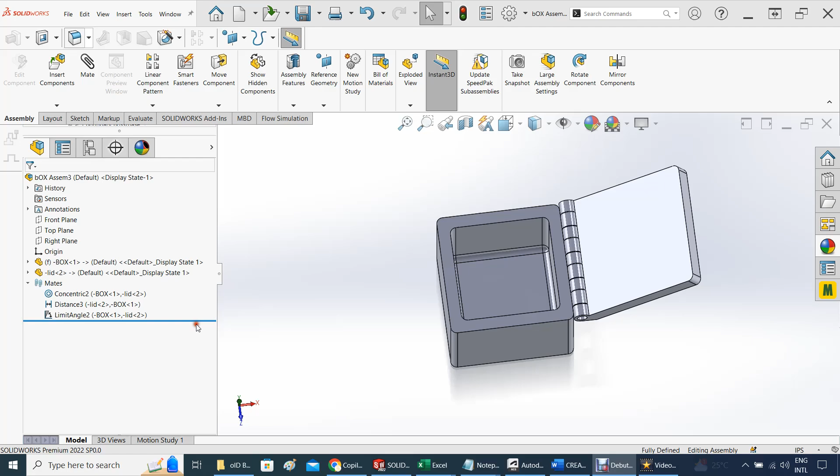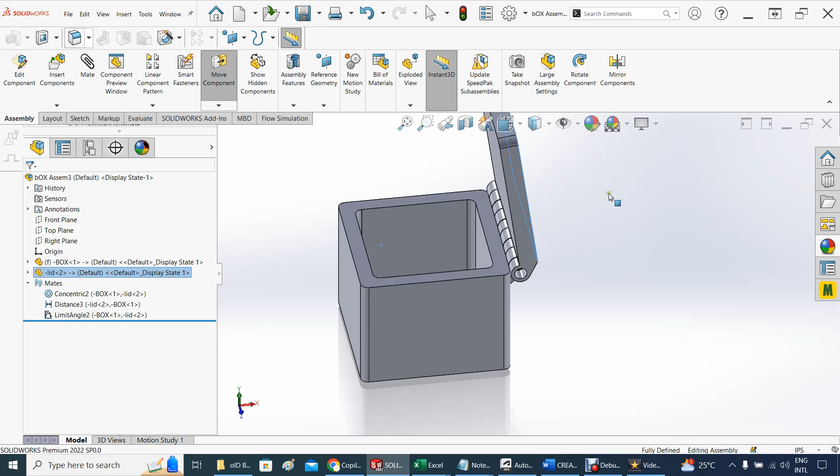Hello folks, today we're going to be discussing how to build this kind of a 4x4 box, 4x4 inches type of box, and how to construct this hinge so that it doesn't give you trouble. This is going to be for 3D printing, so I kind of smooth some of the edges as well so that it looks nice, even internally, as you can see here. So this video is about how to do this the easy way without much knowledge about SolidWorks. You can do a lot with a few instructions here and there. So that's the main point. Without any further ado, let's get busy.

All right, so here we are. Let's start by creating our box here. Let's call a new one. It's gonna be a new part, and I don't like that. Let's change this to plain white. It's gonna be millimeters. There we go. So we are ready now to go.

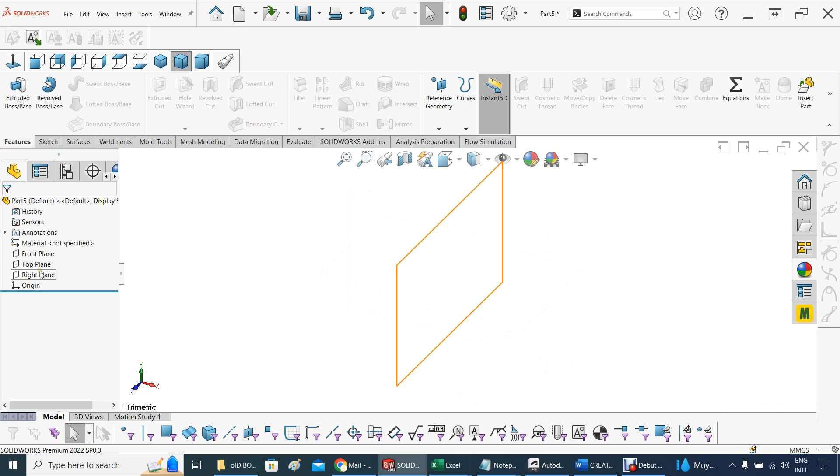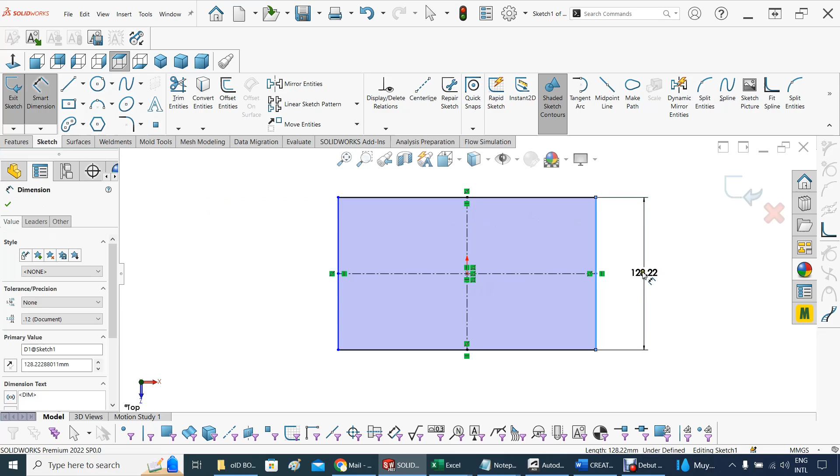Let's see what would be better. Let's work on the top plane, and let's create a sketch there, and we are ready to go. Let's get a center rectangle, and let's see what would be a good size for this. It's gonna be about 4 inches, so you can do 25.4 millimeters times 4. Let's do the same here, so that's 101.6. That will do for a square box.

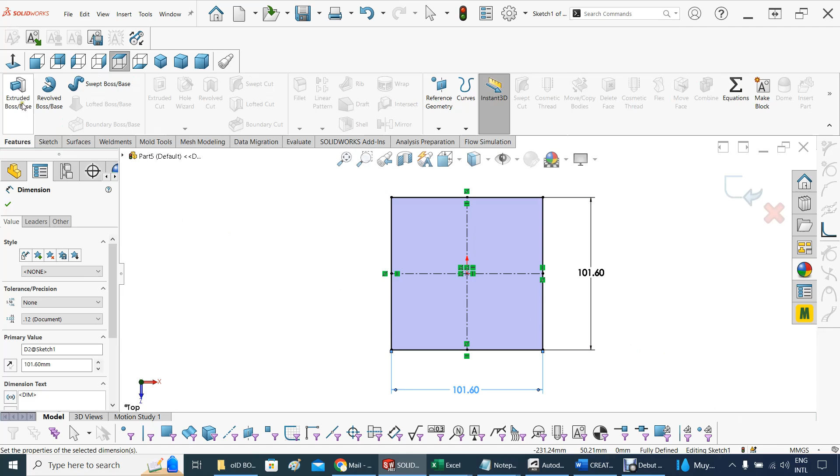Now we are ready to go to features, extrude. Now we're gonna extrude about, if I remember, let me check on that one. All right, so it's gonna be blind. It's gonna be 3 inches times 25.4. Actually, there's something weird here. Let's go back here. So it's 3 times 25.4. There we go, that's about 76.2, and that will do. So there we go, we have our box there, and this is what we're gonna do.

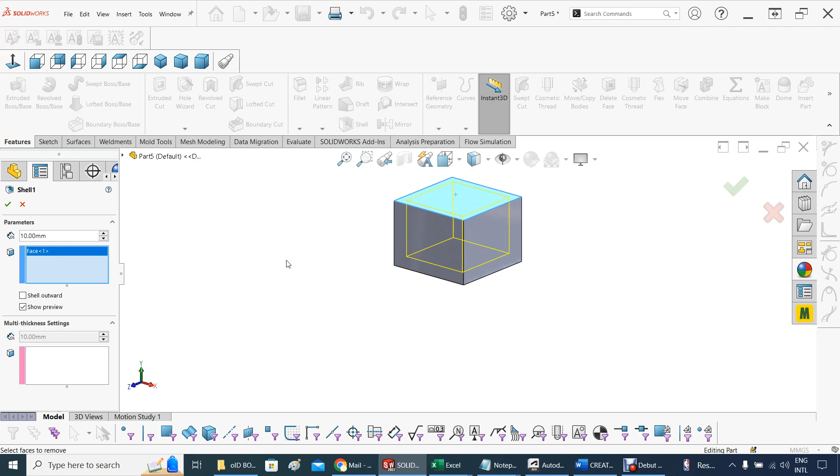We're gonna empty the box. After that extrusion, what we're gonna do is hollow the box, so for that we're going to use shell, and the face will be this one, and 10 millimeters, so that will do. Let's see how that looks. Show preview, that's perfect. You can see the face where we're gonna start hollowing it out. We accept that. There we go.

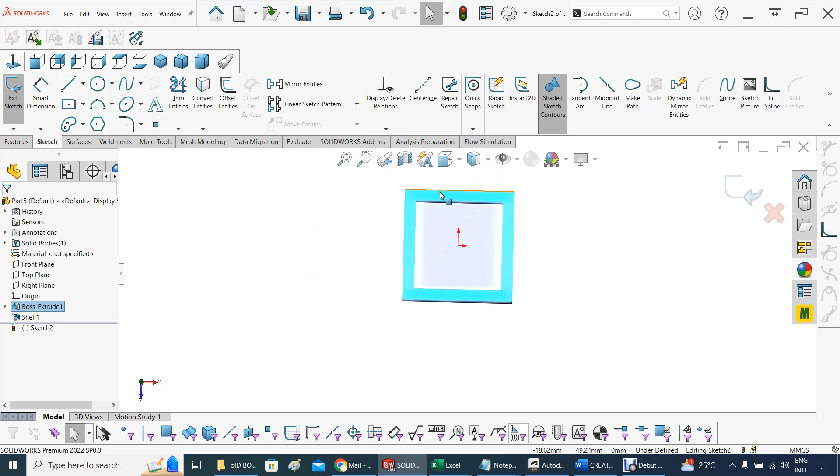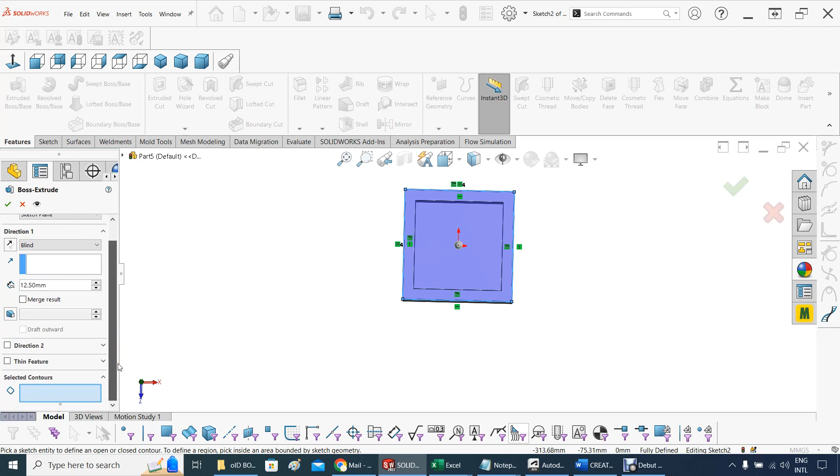So now we touch this face here, that one there, and what we're gonna do on that face is create a sketch, and we can convert the whole thing, and now we can put the lid on it. So we're gonna take a corner rectangle, and we're gonna start there, move up to there, and we're gonna extrude features, and that extrusion is gonna be blind as well, but that's gonna be about 12.5, half an inch. It could be less than that, but I'm gonna try half an inch. Now the important thing here, no merging. You don't want any merging, so that's the two objects. Let's say 12.5 millimeters. All right, select contour, it's the only one I have, that one and that one as well. So no merge, and I think we are in good shape. Accept that.

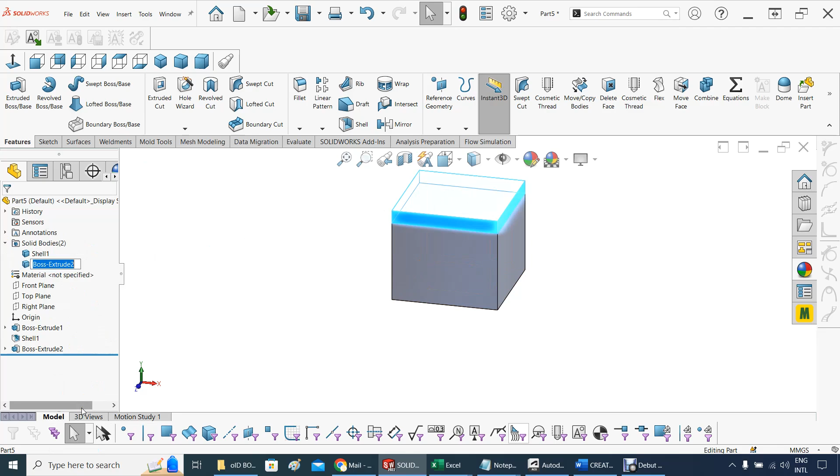Now we have two objects. That's gonna be the lid, so let's rename that the lid, and now this one here is the box. So renamed, this item is gonna be the box.

Now we need to start to work on the lid for the hinge. So it's gonna be a hinge. Let's see where we should put that hinge. Let's look at the isometric here. We can put the isometric there, so let's put the hinge right here on the X. I'm gonna put it right here.

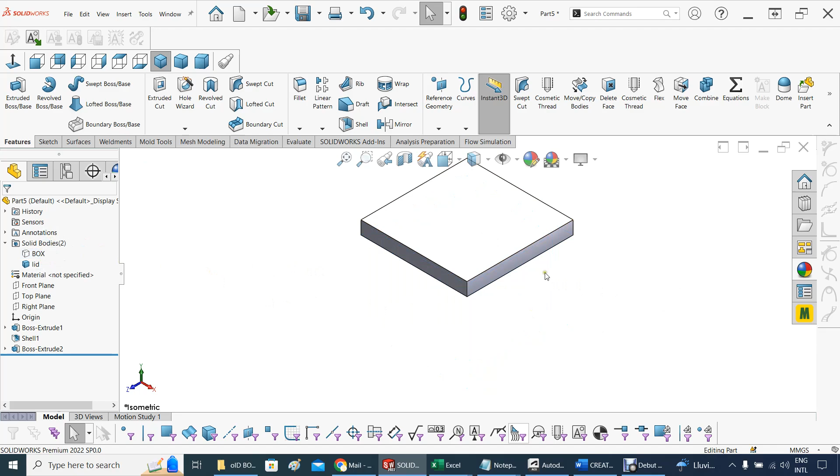So with that said, what I'm gonna do is work here on that. We have the box and the lid, so we're gonna work first on the lid for the hinge. Meaning that I'm gonna make the box disappear just a little bit, so that we can work here on that face. Actually, we're gonna work from this face, just for getting the hinge right. So let's right click here and start to work on that face. Let's bring that face into perspective. There we go, and here's the story. The first thing I want to do perhaps is to get all this.

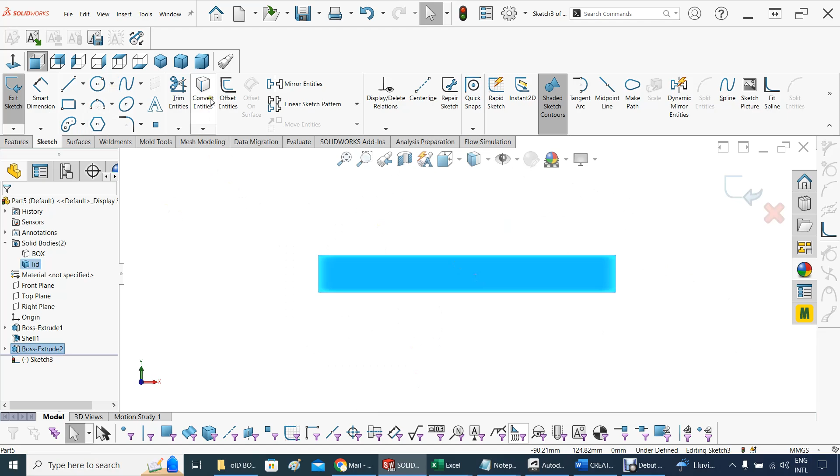Let's convert that entity, and now we're gonna start to work in a circle. That circle should be, let's say, half of it, somewhere there. And now that circle should be...

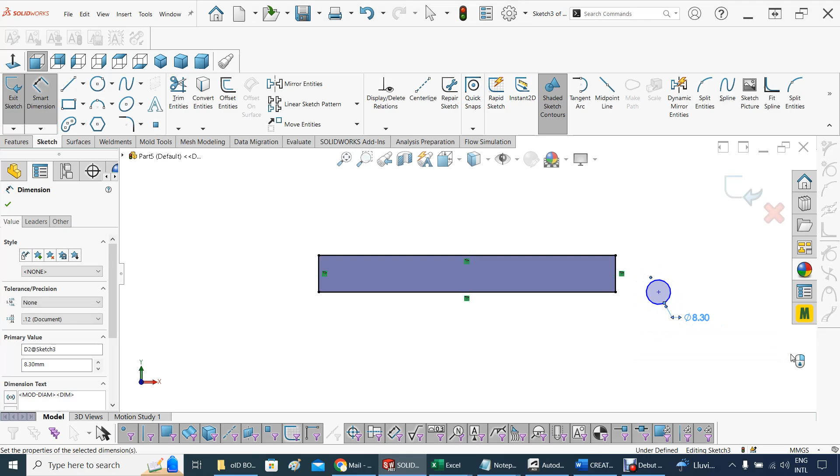That will depend on the precision of your 3D printer. For example, if that's 8 millimeters, I'm gonna put that at 8.2 or 8.3, so you don't have any trouble for your bolt going through. And so that's 8.3. Now let's bring another circle.

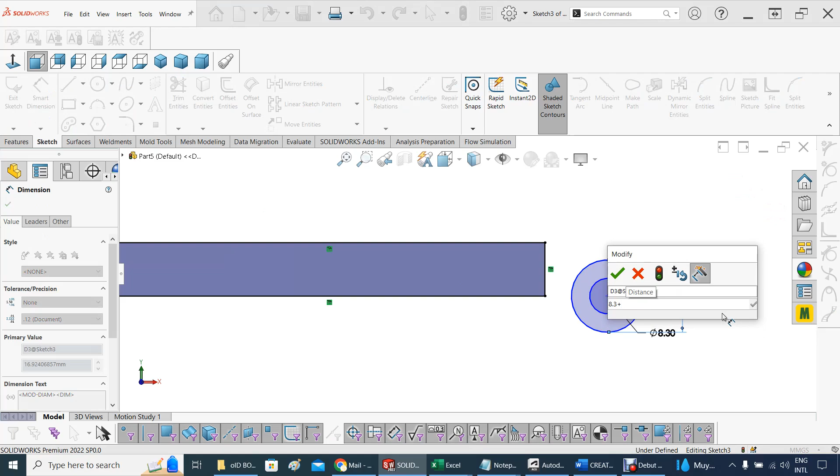That other circle will be, so it's gonna be 8.3 plus some thickness, we'll say 5. That will do. And now what I'm gonna do is make this guy and this point coincident. That will do. Now here's the plan.

We're gonna make a line from this corner, tangent somewhere here. Let's see. Now that point doesn't look tangent to me, so what I'm gonna do is grab that one... tangent. There we go. You can see the symbol right there. So that's good enough for me, because now the next thing that I can certainly do...

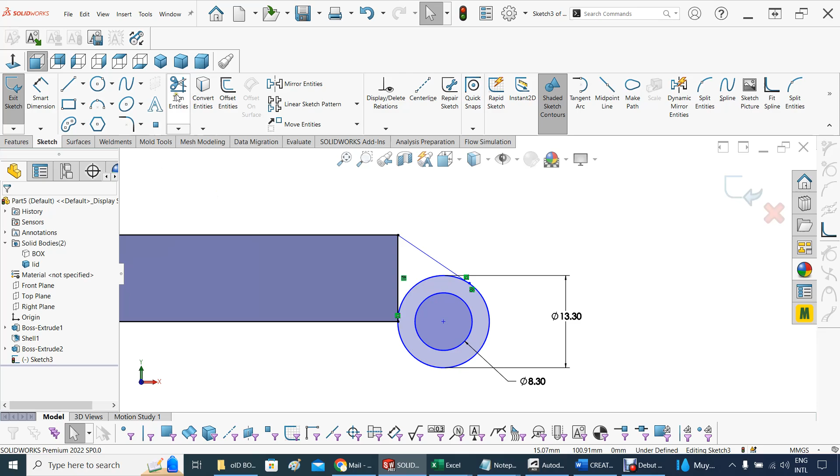Let's trim something here, and I think that will do. That's perfect. That's perfect.

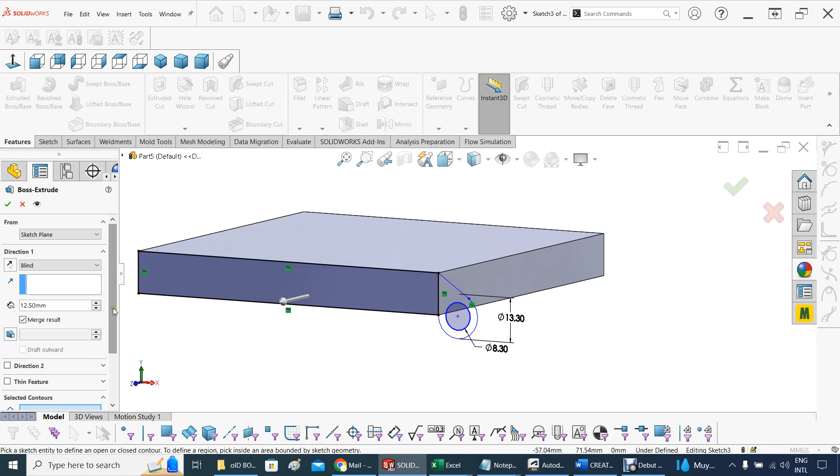Now accept that, we're out of here, and now let's go to feature and extrude. Now what we're gonna extrude, let's get here into the contour. That is the wrong direction, so let's switch the direction. That will do. And what's the thickness of that?

The good thickness of that will be about 10... merge, yes, but that's 10. And...

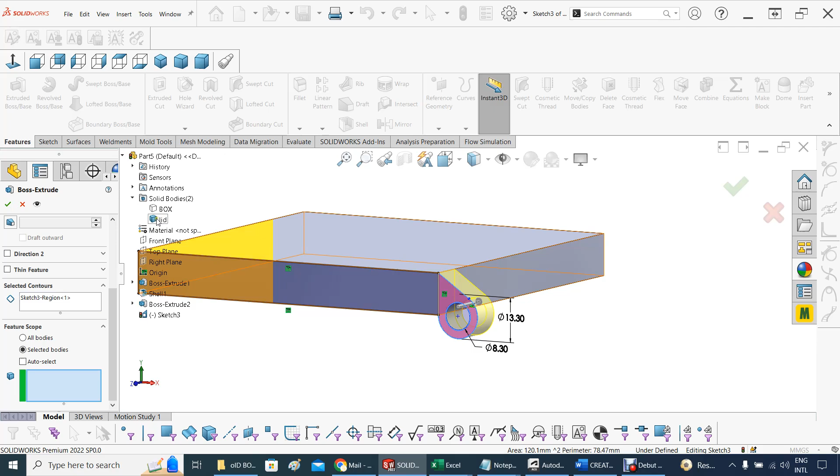Selected body, let's see... selected body here has to be obviously the lid, that will do. Now it's gonna merge to the lid. So with that said, let's see, anything else here that I need to do? It's gonna merge to the lid. That's not great, so we're gonna accept that, and there we go.

There's a little bit of, some people are cracking some fire around, so don't worry about it. Anyway, so with that said, let's see now where we are.

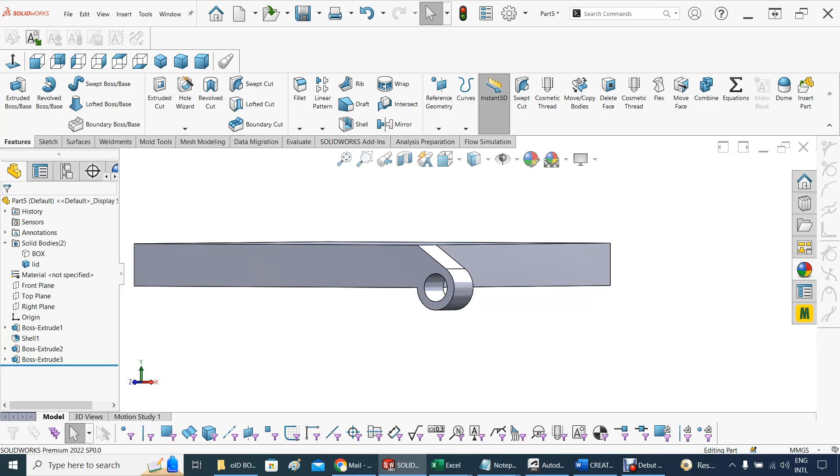What we're gonna do now, I create the first one. So we're gonna create a hinge out of it, and what we're gonna do is create about 5 of this guy through this line. So that's easy if you go to a linear pattern here.

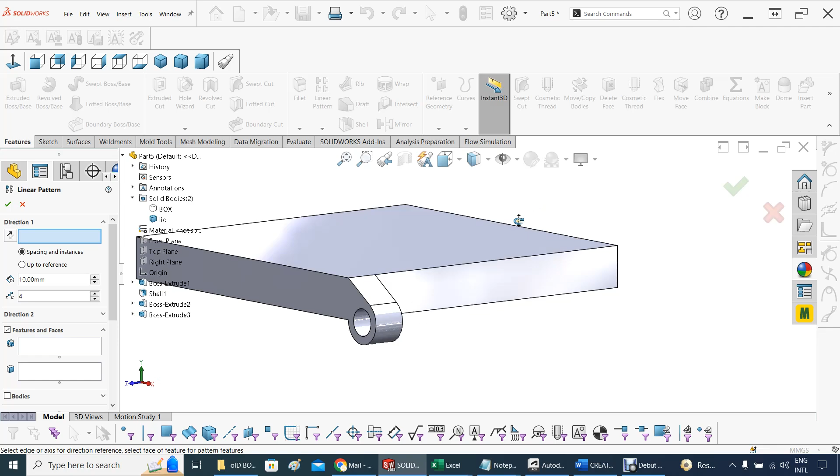So let's go a linear pattern, and we're gonna pick that as direction. Now it's gonna be 5 of these. Now here's the story. You can start to guess.

The idea is you're gonna put as many of these so that they kind of spread all over, but the last one ends up right here. You can do the math. So that would be, remember this length, which is 101 point something, and basically that distance, when you subtract 5 of this guy, because I'm going to install 5 which are 10 millimeters each, that will give a spacing, and the spacing has to be about 22.9.

So what we're gonna copy here, the feature that we're gonna copy is that guy. So you can see how quickly you get right to the edge here. That's perfect. That's why it has to be 22 point something, 22.9, just so that you can fit 5 of this guy for the lid, and anything else here that I need to take a look at.

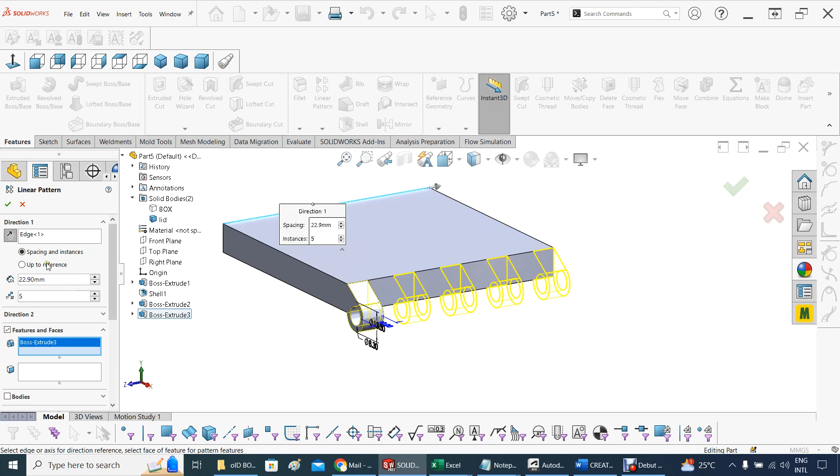Sounds great. Sounds like we got everything set, and we accept that, and there we go. Right there, you have the lid with your half of the hinge.

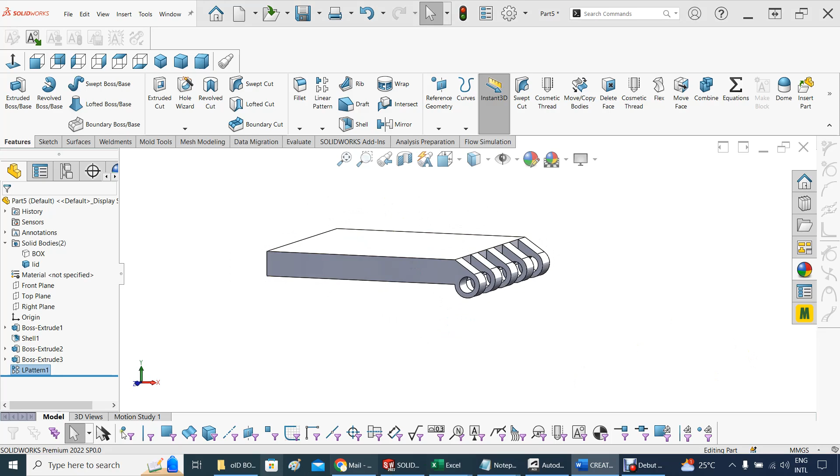Now you need the second half of these hinges that will go on the box that was on the lid. Now let's work on the other part, and let's see how we'll do that. That looks good. So to do the other part, here's the story.

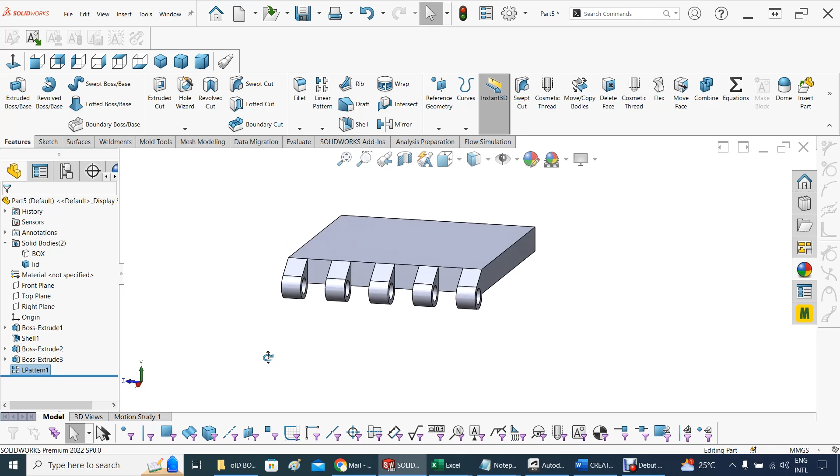The other hinge for the box will start somewhere here, but since this is going to be 3D printed, you don't want to be touching these. You can certainly do it and then do some sanding, but I don't want to do that. So what I'm going to do on this one is to define a plane.

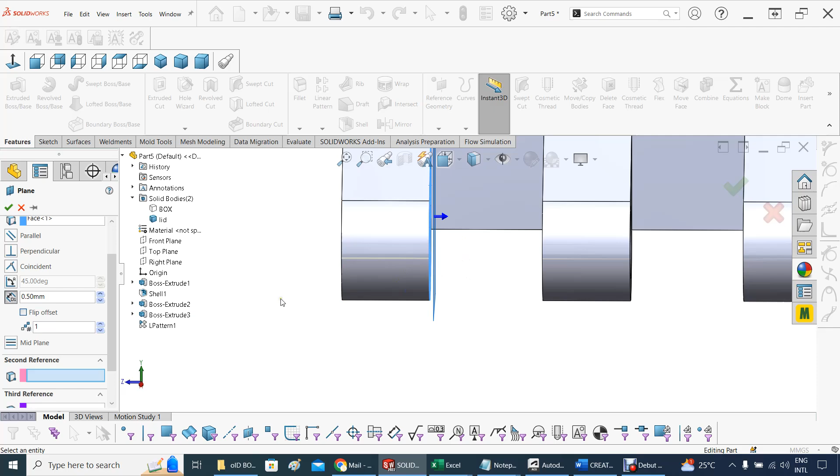So right here somewhere, hit that, and now let's go to reference plane, and 0.5 will do in the right direction. Yep. So that's the distance between here and the other part, right within the precision of your 3D printer. Could be more, could be less, I don't know. I will say 0.5 for the time being.

And with that said, we got that plane done, and now what we're gonna do is work on that plane, and let's create a sketch there, and let's bring that sketch to the right perspective. I don't like that way. One more. There we go. Perfect. So this is the story. What we need now is to perhaps create that one.

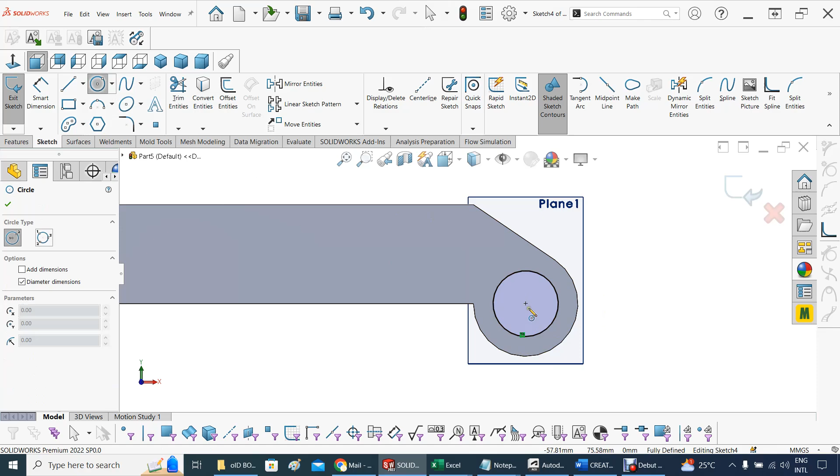I can certainly convert that entity as well, but what I'm going to do now is bring another circle, but this circle will be that one, same diameter, and where we are now.

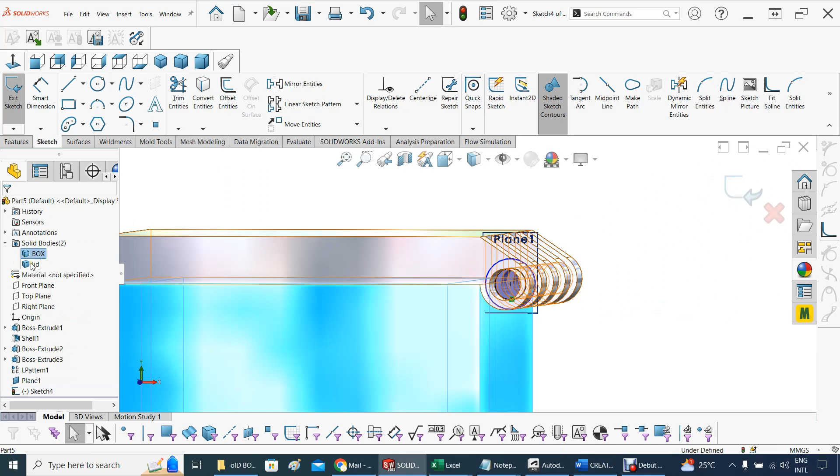All right, so here's the story. You want to make the box visible, but now the lid, you want to disappear that for a little bit until you get this right here, and bring that right into the other way. That will do.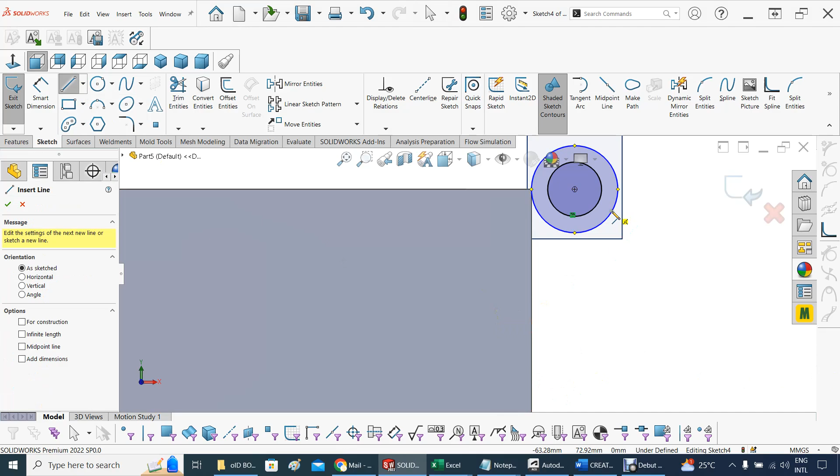Now what we need now is, after we do that, we want to create the support for that, and let's use the line. We're gonna fix that in a second, and let's do the following. That line, oh yeah, it is tangent already.

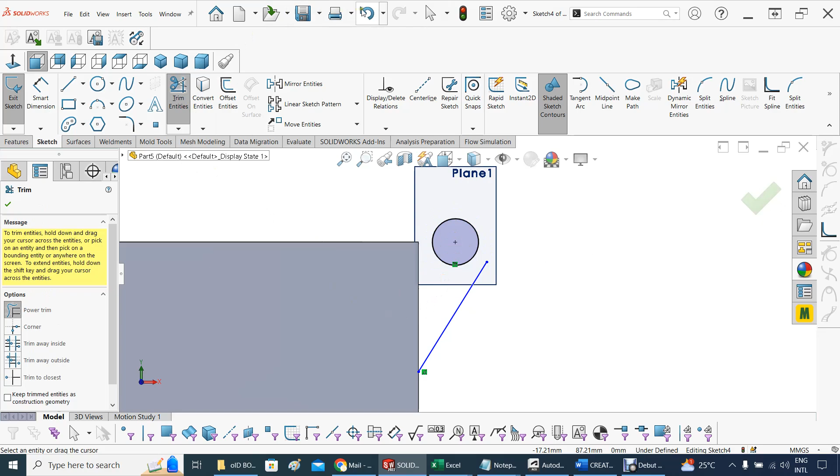Good, it is tangent. So what we're gonna do is, let's see if I can trim a little bit without creating problem. Oops, too much. That'll undo. Let's fix that. And here's the story. Let me try this arc for 1 second here. There we go. I'm gonna try that arc, and let me see now the trim. There we go. That will do.

So I got everything, and I also have the ready to do that. Let me bring another line here. That guy and that guy.

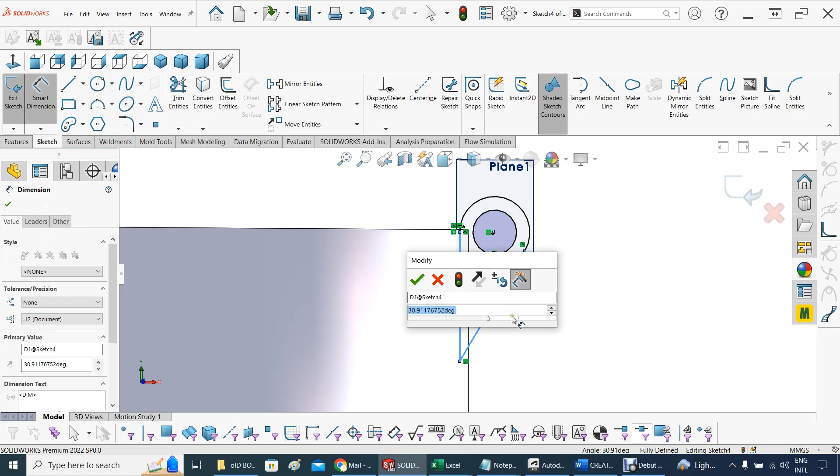All right, there we go. And then let's see, between that guy and that guy, let's see where we are. It should be about 45. That will do. And now we're talking. Yep, that was missing there, sorry.

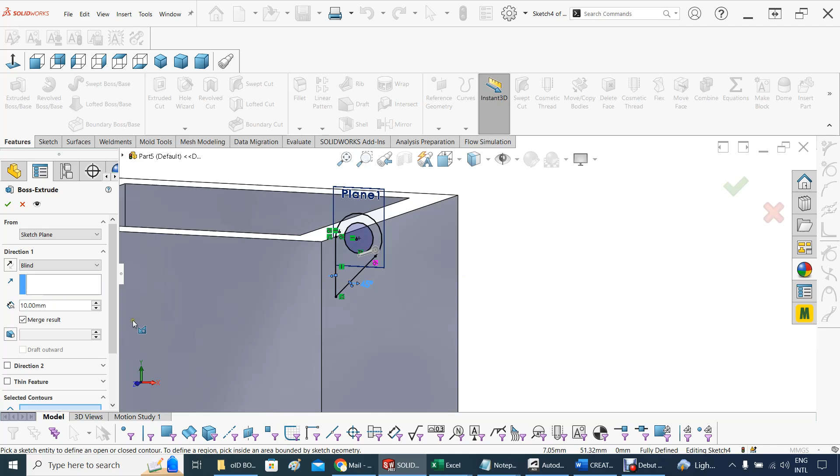So with that said, I think now I can go back here and extrude. Again, let's go to contour. There we go. Now that's gonna be a little bit thicker than the other one, so that's gonna be about 12. Let's see, 12.

And it's gonna merge. Now be careful what you merge here. Select body. It's gonna be definitely the box, so we accept. There we go.

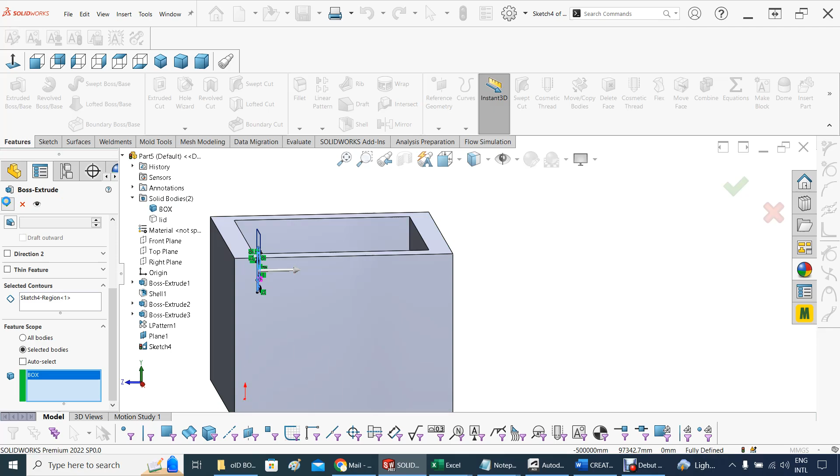Now let's get the plane out, and let's bring the lid. See, you get a distance here of about 0.5, another distance here of about 0.5, pretty much right in where I want it.

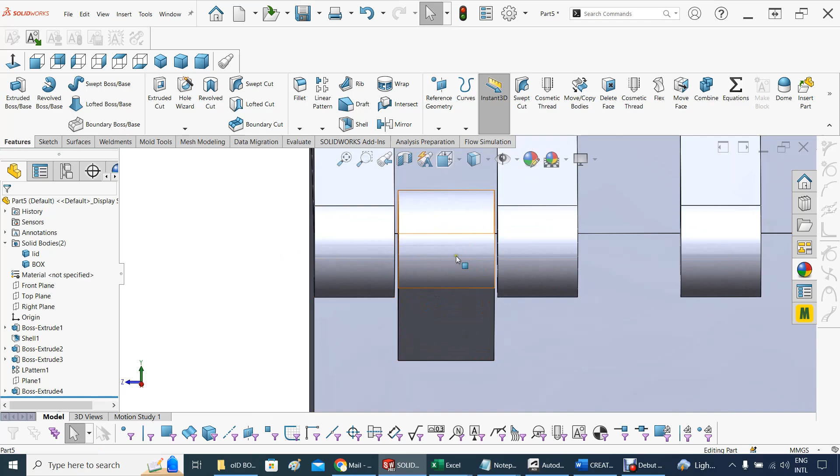All right, so what we need to do is to repeat this guy 1, 2, 3, 3 times. So let's see how this ends up being. All right, so let's see.

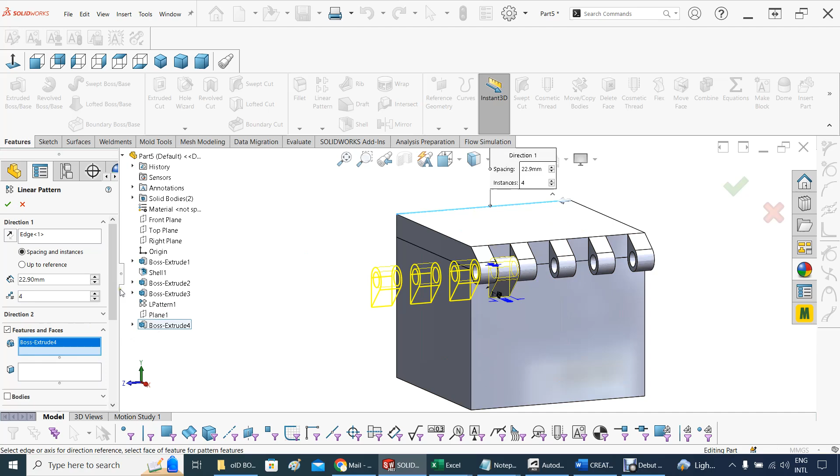Let's go back to pattern, and the direction is that direction, and here should be 4, and picking that, that guy, features that guy, and direction. There we go. Four. All right. There we go.

And anything else? I think that we are pretty good, in pretty good shape. Again, 22.9 ends up being a very important distance. That is based on the total length here. So be careful with that. And we got pretty much everything set. So we accept. And there we go.

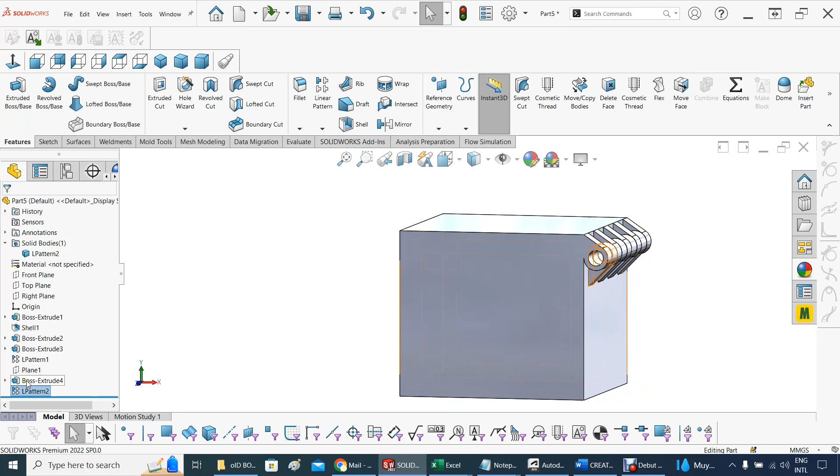Let's see. One body, not good. You see, not good. Let's go back here to that pattern and be sure that's the problem. So let's hide this for a little bit. I got the both, yeah. So the problem was right at the pattern.

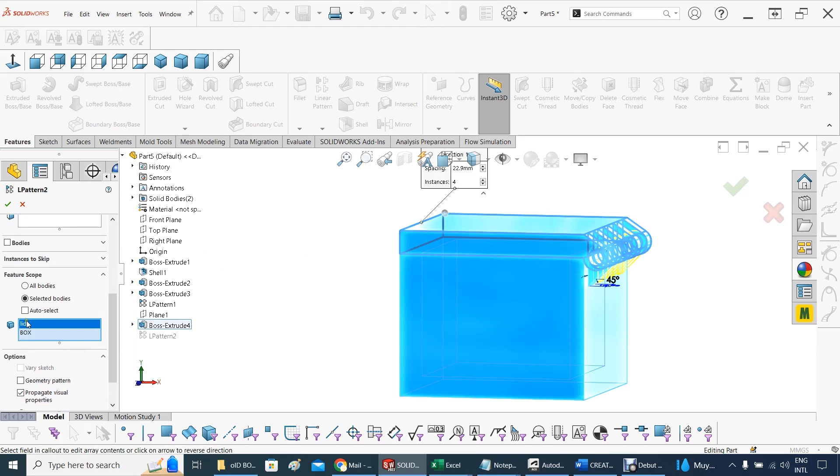Now, let's go back here for a second. And the problem is, oh, got both here selected. No, lid's gotta go, delete. So you stay with the box. And what else I have here? Lid, box, lid, get it out, stay with the box. So no question asked now.

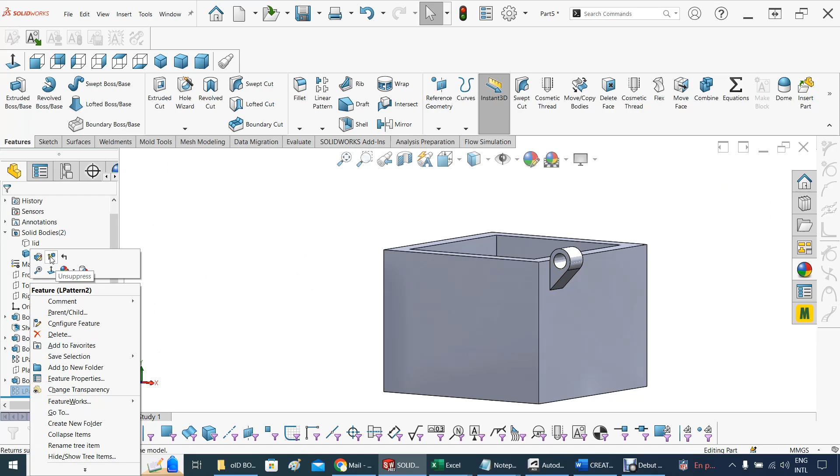And so let's get this going. There we go. All right, let's put back the lid. Now we got the both object. Excellent. That looks good. You see how simple it was?

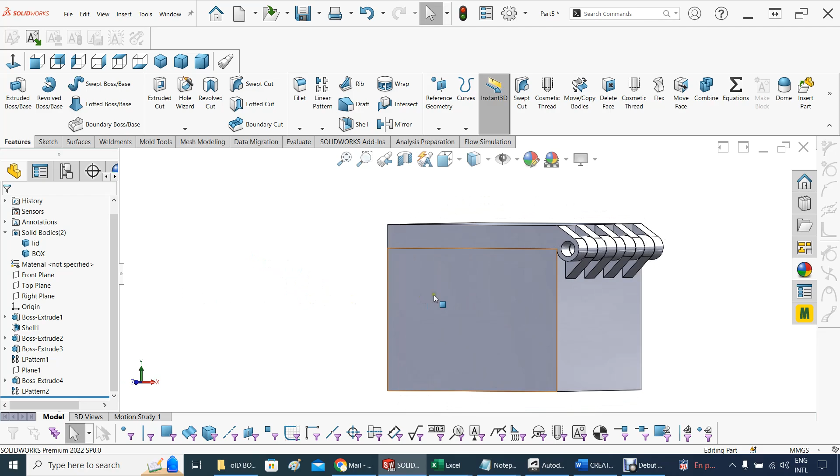So I got the box and the lid. Now, the only thing missing here, if any, is just to put kind of the bolt going right through. You don't need it if you are going to do, in this case, assembling. It's not really needed.

You can certainly insert it and create one for, just to entertain the fact that you need a hinge here. I mean, you need a bolt so that this hinge really works in real time. But what I'm going to do now is just save both pieces now that I've created this kind of hinge.

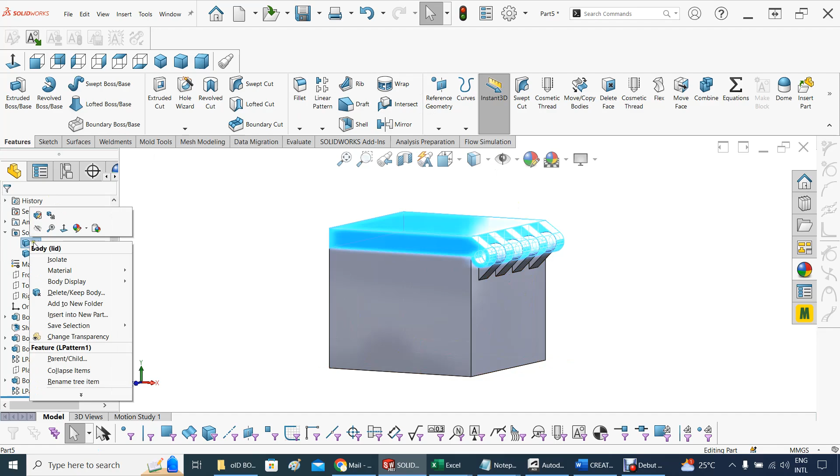So I'm going to save the lid and the box. When you complete that, then you just go to assembling. So for example, let's go to the lid, insert into new part, and that's going to be the lid. So we save, and that's your lid. It's going to ask for saving somewhere, and let's save this.

For the time being, let's save it on the downloads. So I'm going to save there, and then move it someplace else later. Then let's go back again to Solidworks.

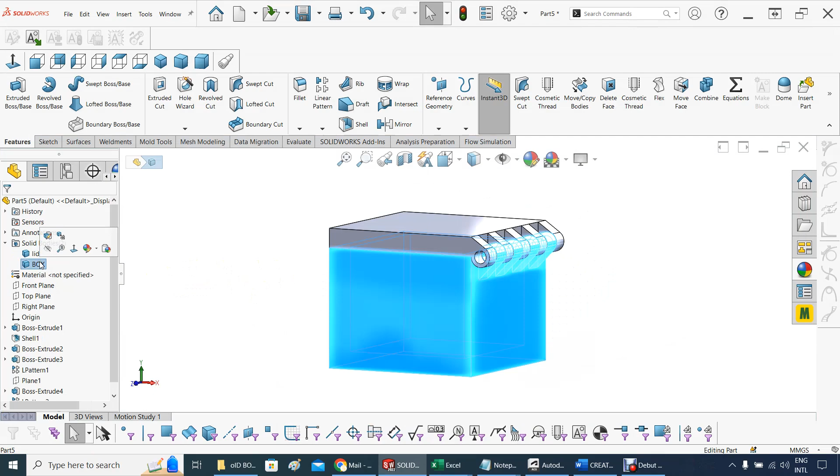Design. Now save the box. Right click, insert into new part, box, save it. Yes, and we say yes. So we got the lid, we got the box, and save. And we are done.

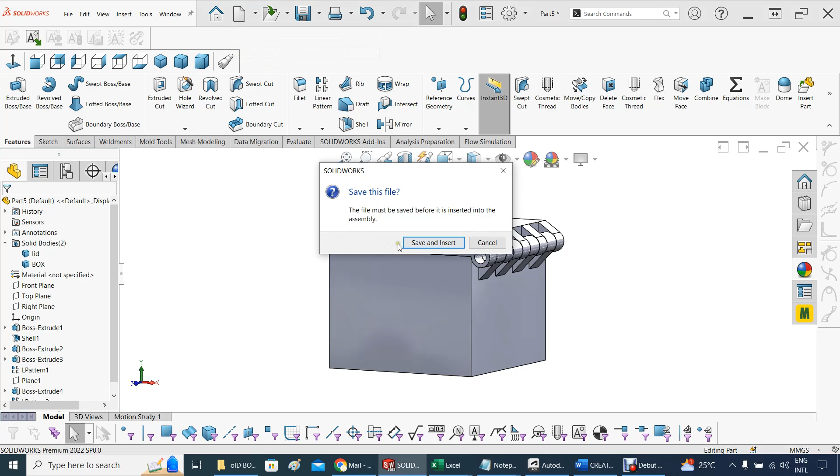Now what we need to do is go back here to the original piece, and let's go to assembling. So let's say new, make assembly from part, save and insert. It's going to be box with hinge rep, or I've done many of those. I'm going to just start to mess with this, and you end up creating many with different sizes and things like that. So here we are.

Now the first thing that I need is definitely the box. So we're going to hit the box here, and let's put the box here somewhere. There's the box. Now the box is fixed. Good. Now insert again, insert component, existing part. That's going to be the lid. Put it here somewhere. There we go.

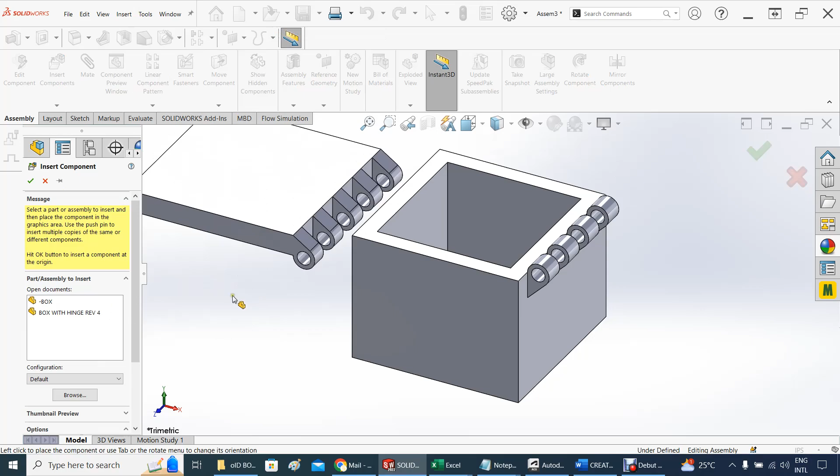Now it's easy to combine this, because basically what you need is that this circle needs to be concentric with this one. Hit control, click here, then let it go, and hit concentric. Now this will move kind of crazy - you don't want that, but it gives you an idea where you are.

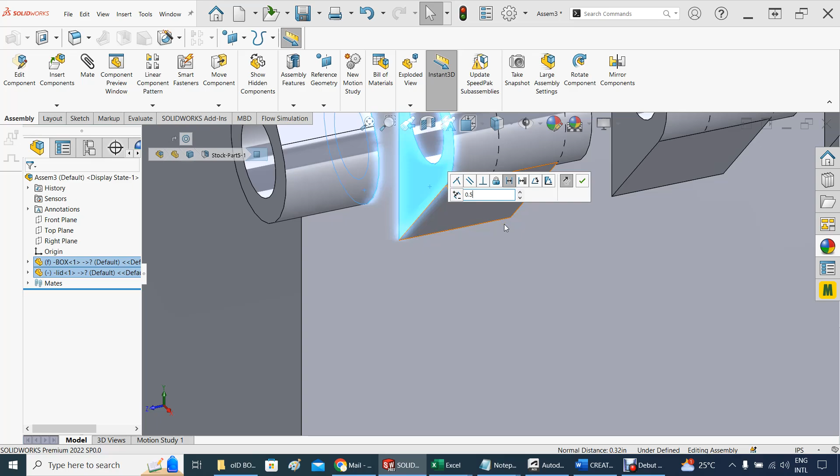Now the next thing is you want the distance that you set before. For this, you said that this surface versus this surface, that distance is about 0.5 inches. So let's say yes, and there we go. Everything aligned properly, but this is kind of weird.

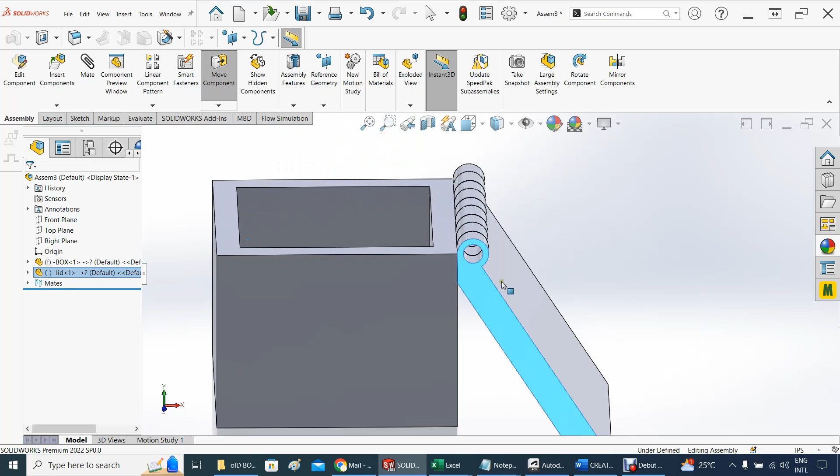You don't want that, but what you really want is that this starts to work as per the design. When it hits here, that should be 0, and let's say that you can open this, I don't know, up to there maybe. Let's see.

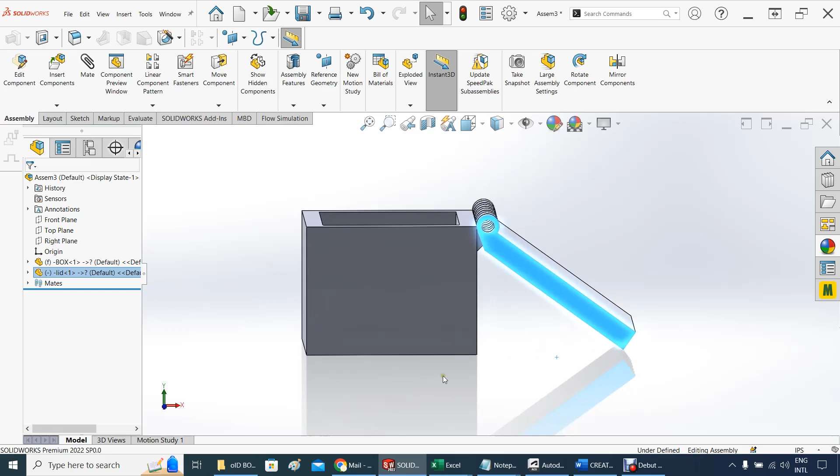I think that should be up to there, up to there - that would be kind of the maximum. But obviously, if the box is going to be beyond this distance, so probably somewhere here is where it will turn. That's easy, I can fix that at a later time.

So basically, what we need at this point is to set the proper angle. So you just set this guy, control, and that guy. So the minimum should be 0 degrees. The maximum maybe 140 - can check that out later. So we accept that. Let's see, 140.

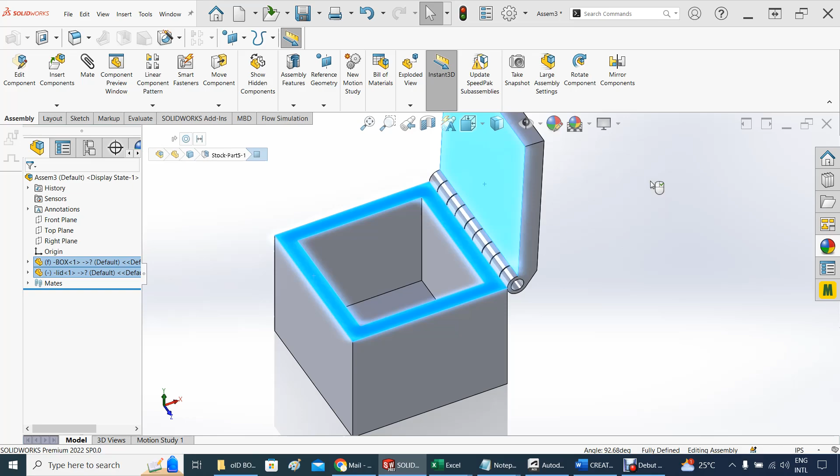Should be more than that, but you see, when it closes, you slam it, it would not go any further from there. And you can open it, but it definitely could open more.

Obviously 180 would be like here. If I go back here and check that limit and revise that one, I can set that to 180 and check 180, accept that, and this can go up there, you see, but it can definitely go beyond 180.

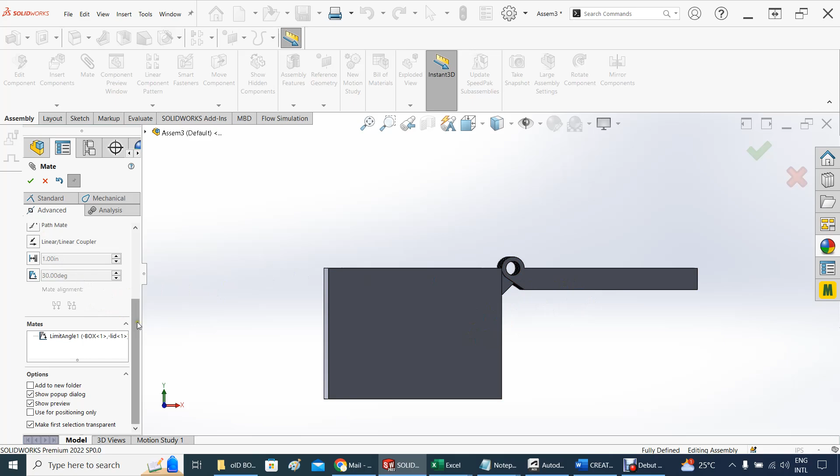I don't know, about, I can estimate that. You can keep messing with it until you find where you want that to go. Let's say a little bit more, about 180... I don't know, 220. Let's see what happens.

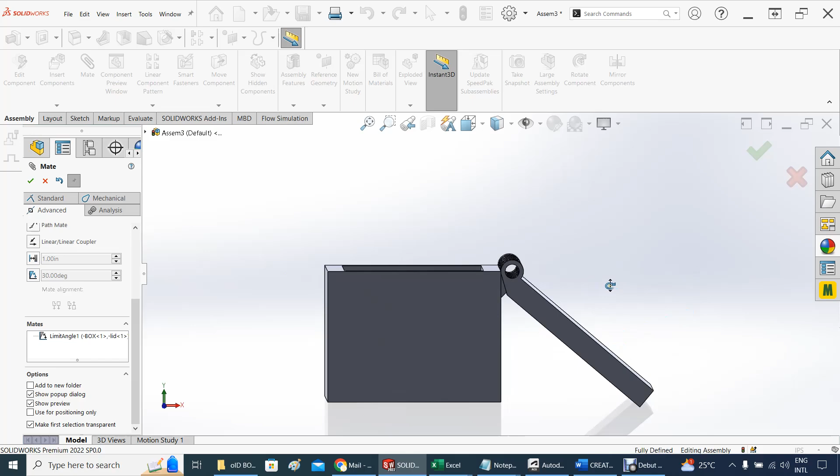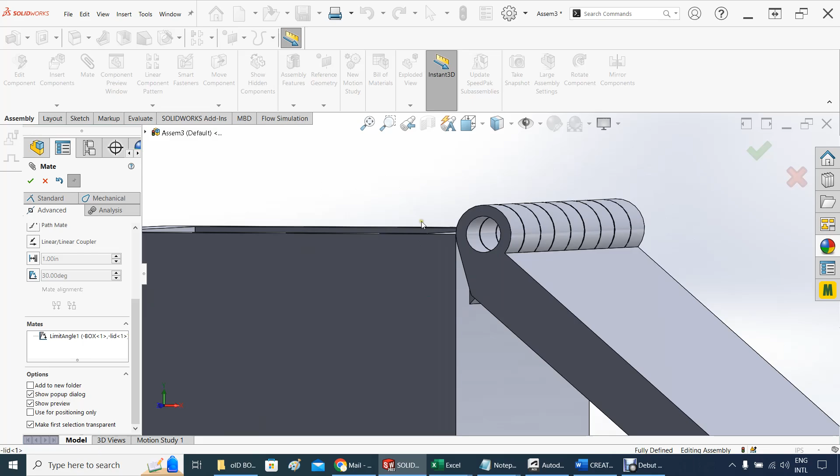There we go. 220 is about almost, maybe less than that, but it gives you an idea how much this will swing without causing trouble. Obviously, when this part here hits this part here, then it's done - that will not move any further. But to give you an idea, that would be beyond the bottom of the box.

But it's kind of cool. You see, now it locks. That's how it works.

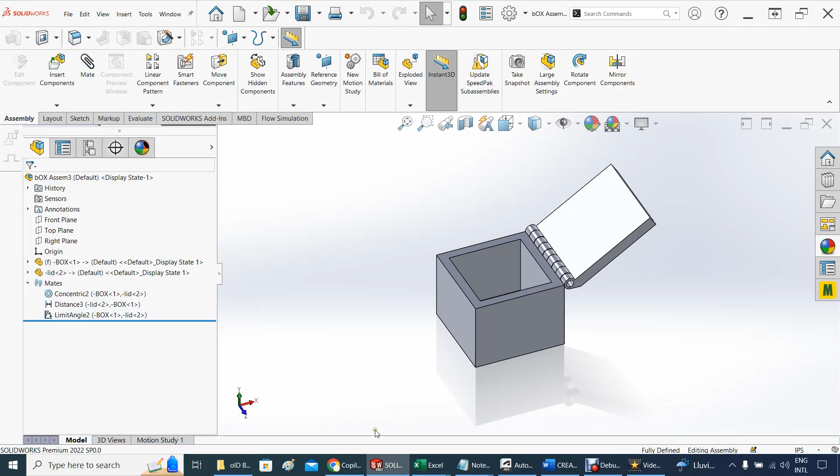Alright, so as a final thing to do, I would like to smooth out these edges a little bit since this is going to be 3D printed. This is one of the nice things about Solidworks. So let's go to our original Solidworks file, right here.

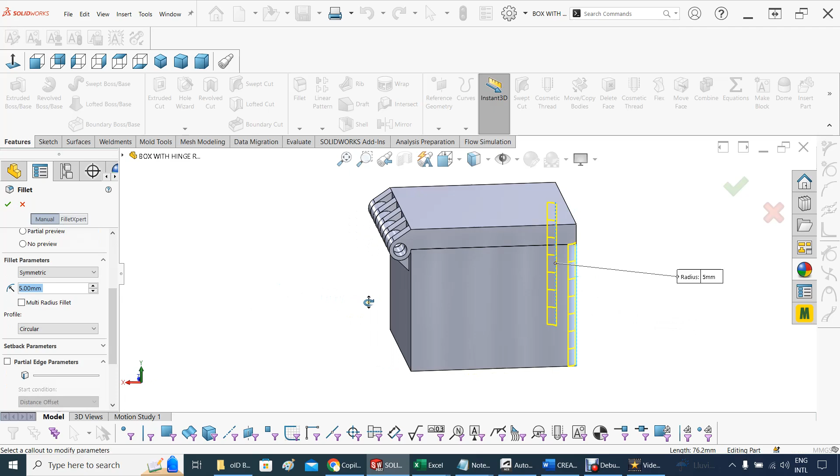Here is our original, and what we're going to do is take one of these edges and go to fillet. Let's say 5 will look good. Maybe it's too much, but no, it sounds good to me. So let's smooth this one as well, and that one, and this one. I'm working on the original, so let's accept that.

Now let's also smooth these edges as well, that one, and that's gonna be 5 as well, symmetric. We're gonna smooth this one as well. That looks good, so we're gonna smooth that out. Now when you smooth those out, remember that these two are sort of the son of this guy, the original.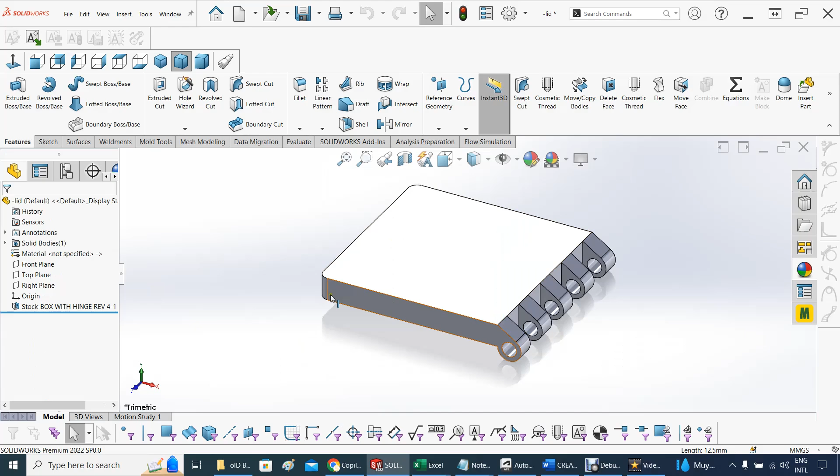So let's go back here and see what's happening. When you touch it, it's updating—check it out, the lid got the smooth edges. If I go back to the box, it's right here, that should also go and update with the smooth edges. Excellent. So once you've done all that, if you go now to your assembly, everything will end up with those smooth edges as well.

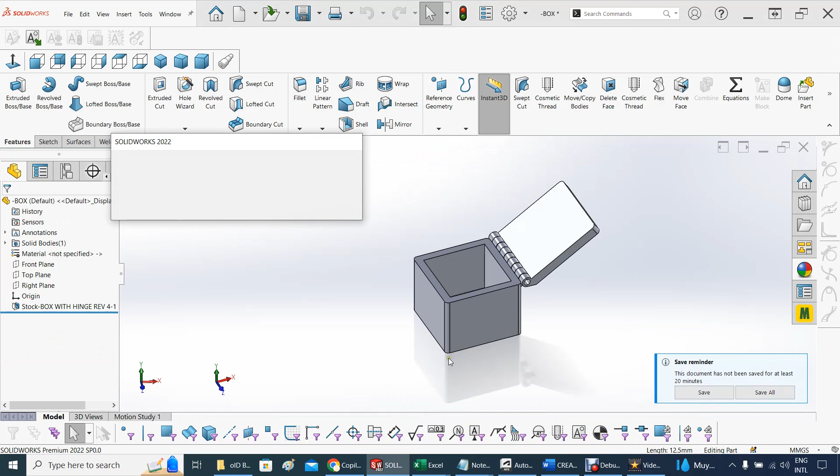So let's go to the assembly. Which one of these? I think it's this one right there. It's updating—model contains assembly that has changed, would you like to rebuild? Yes. So it updated everything, and now let's see this. Yep, looking good, with the smooth edges.

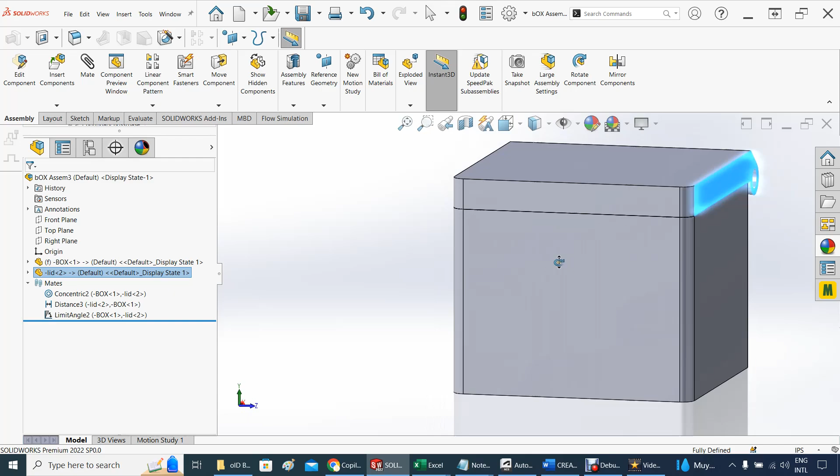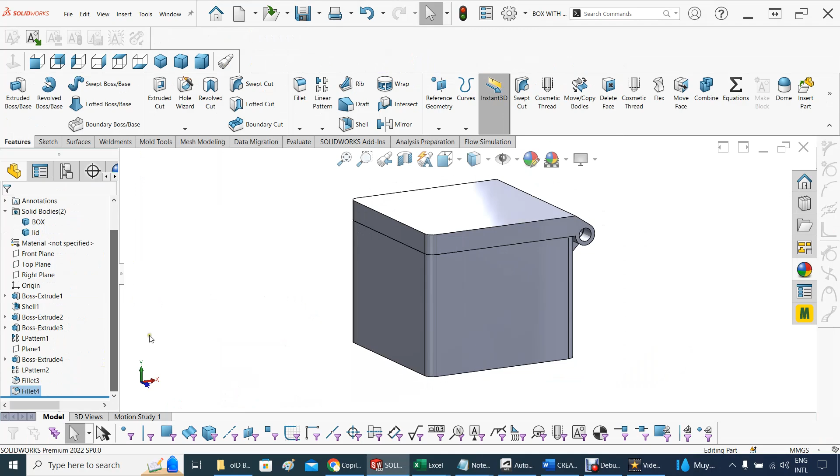Now you can add color if you want to. I don't know, maybe I should add color just to get this done. Let me add some color to this. Let's go back again to the original, and this one, and I'm right there in the original. So now let's go and add some color here.

I really like the green color, and the green is gonna go to that surface, not the whole box, just the body, and that will do. Now let's add some color as well, maybe this yellowish color to the top, again to the box, and that will do. Looking good.

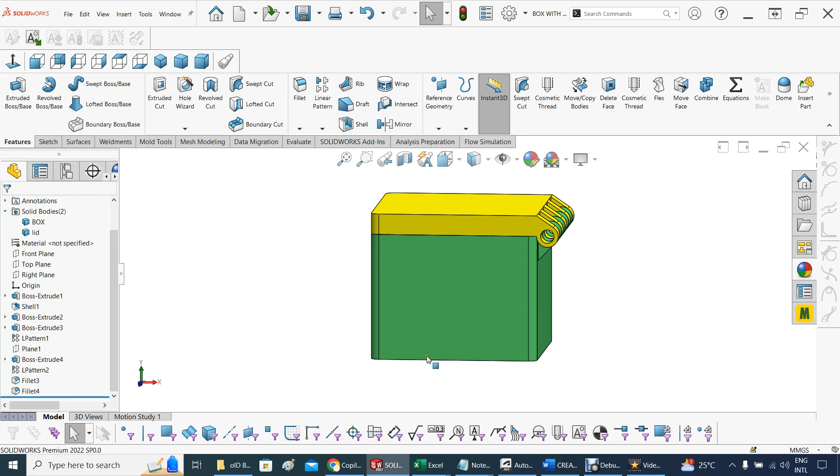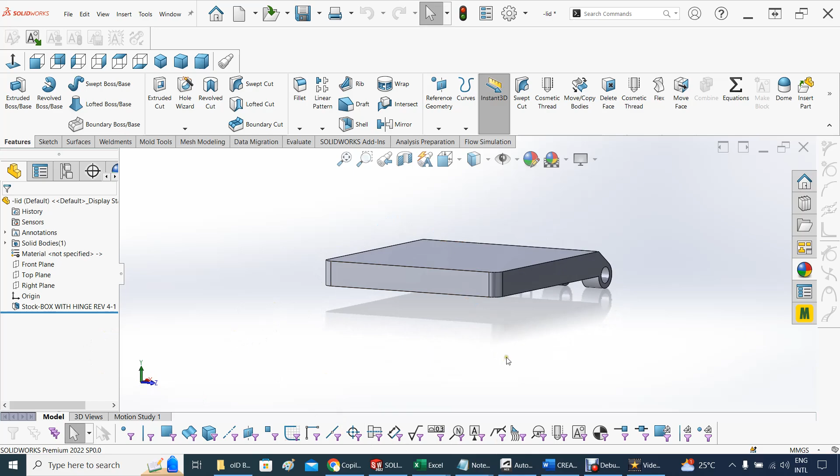All right, let's see if this color gets updated as well on the other elements. Let's see here. Actually, it doesn't get updated. Let's see, not that one, not that type of property. So I have color in the original, but it was not transferred. This is SolidWorks Premium 2022—maybe on the newest version of SolidWorks that will be transferred as well, but it's not happening here.

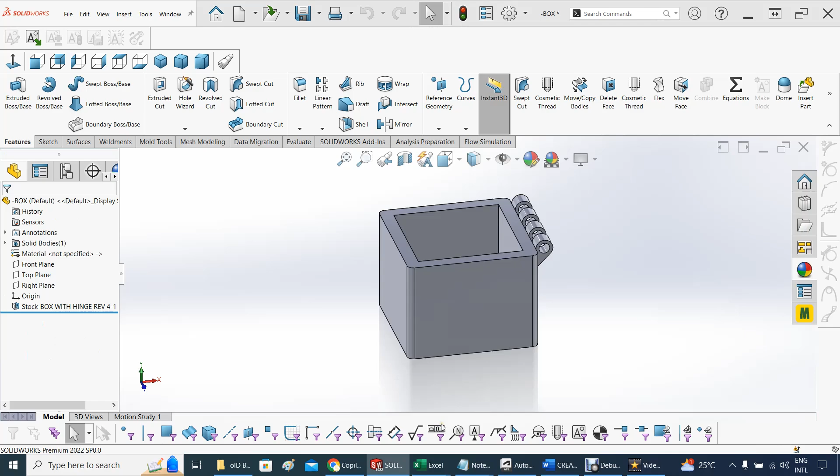Let's see on the box. Not at all. I'm checking here just in case I need to reveal something. I doubted that it went to the assembly. That's the assembly. Nope, there's no color for anything. So that's basically it—if you want to add color, you'll have to add it here on the assembly as well, but I would not do so. I mean, I'm done, but it's kind of interesting that that property isn't available.

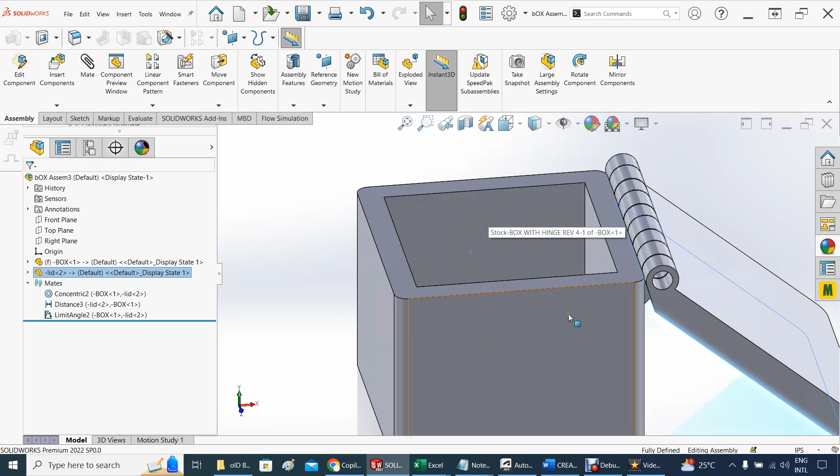Let's do some smoothing internally here, just for the sake of the argument, and see how well it's updated. So I'm going to go back again to my original box here, right there, and let's take the lid off. So that's going to be out, and I'm right here. So let's smooth—perhaps what should I smooth? Let's smooth some of these internal edges, and let's see how this updates. That looks good.

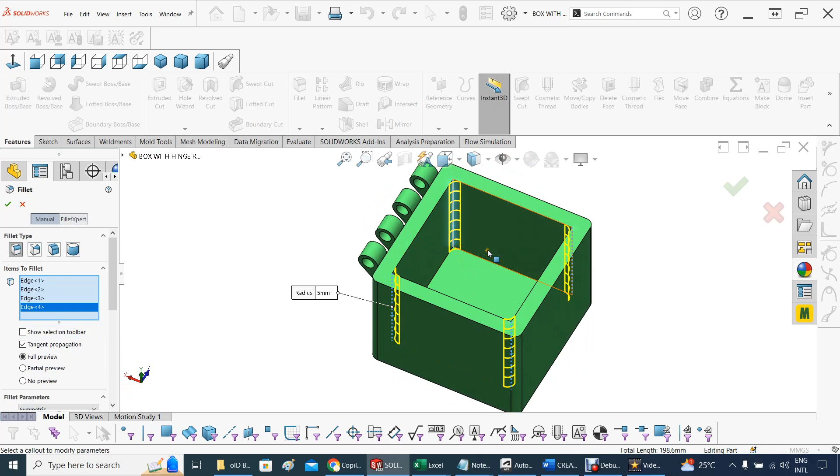How about this one as well, and the last one, this one. How about on the internal as well? I just want to see how this looks. Let's accept that. It's kind of nice. All right, so let's see how well this was updated.

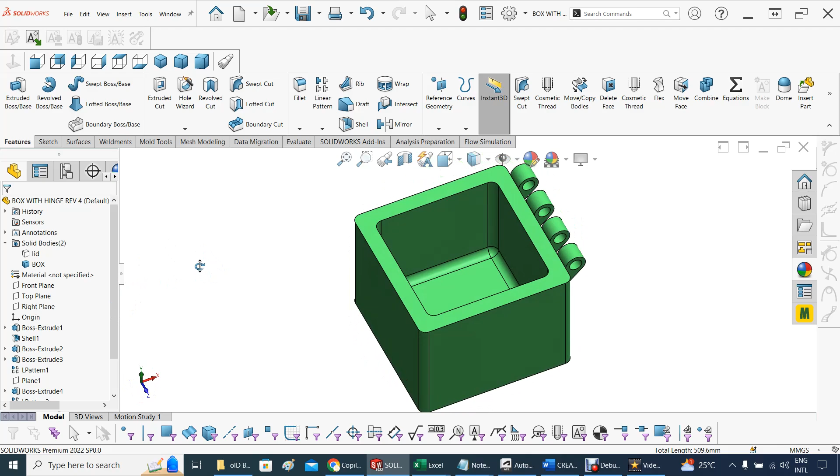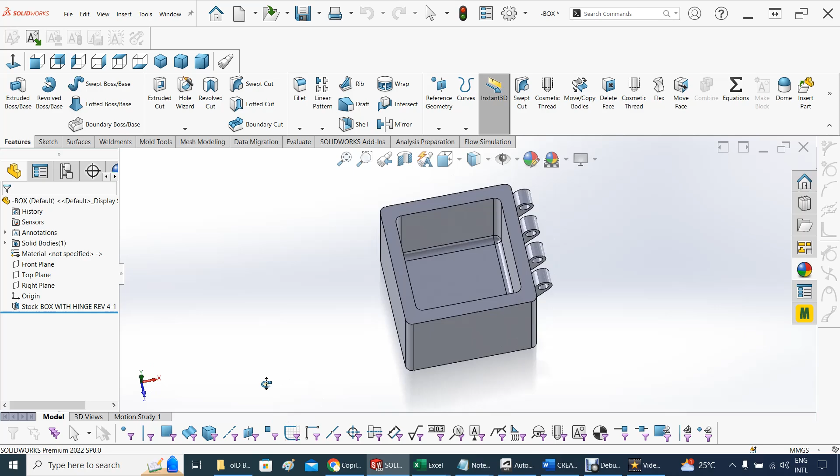Let's put back the lid on, and let's go back here to your box, and take a look. Yeah, the box is updated—it's just that color issue, that color property isn't updated, but everything else looks good. So let's go back now to the assembly, and probably it was updated as well. Right here, yes. Cosmetic isn't updated, but the structure like this is properly updated.

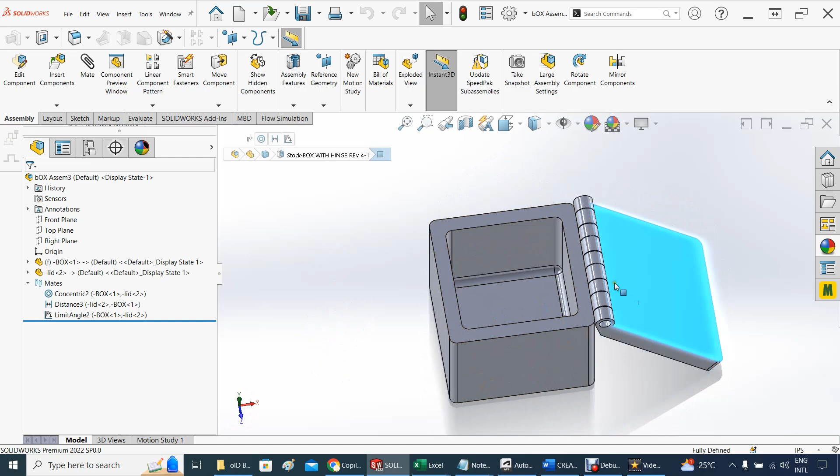So that looks super, close nicely, and we have no doubt that this will work as intended.